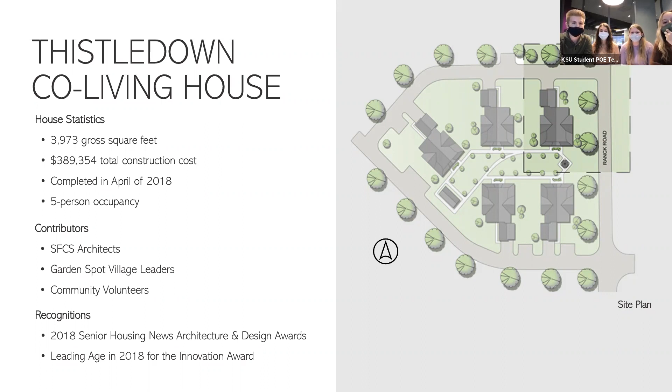At a larger scale, the co-living model seeks to solve social issues commonly associated with modern-day senior living. These issues include isolation for older adults, aging in place, and limited options for affordable housing. As a result, Garden Spot Village and SFCS architects sought to solve these issues by focusing on 3 things.

First, creating an environment that supports the sense of community for 5 unrelated individuals who reside under one roof. Second, applying universal design principles to accommodate all users. And third, providing a safe, high-quality, affordable housing option for low-income seniors.

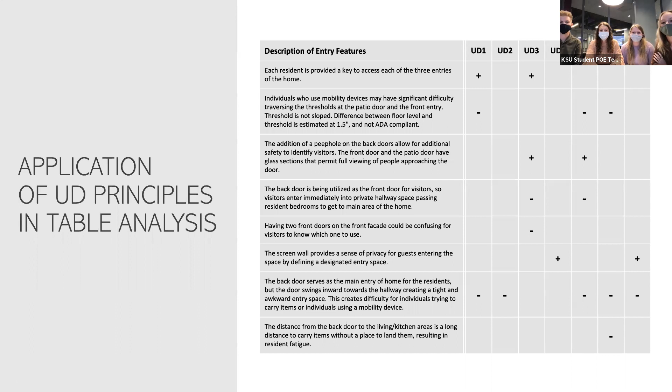Our analysis included 174 total observations throughout the house that correlated to the 7 universal design principles. About half of these observations were categorized as positive features, and about half were opportunities we sought to enhance the universal design for the occupants living within these co-living houses.

The results from these matrices were then crafted into recommended improvements for future co-living models, which we will get to later. So now it gets to the more fun part: the actual tour of the house.

We would first like you to see the overall floor plan and discuss its characteristics. The floor plan is defined by the centrally located primary social and community areas of the home that are shared by all residents. This includes areas such as the kitchen, located in the left portion of the yellow area, the living room in the upper middle portion, and the dining room in the bottom area that juts out a bit.

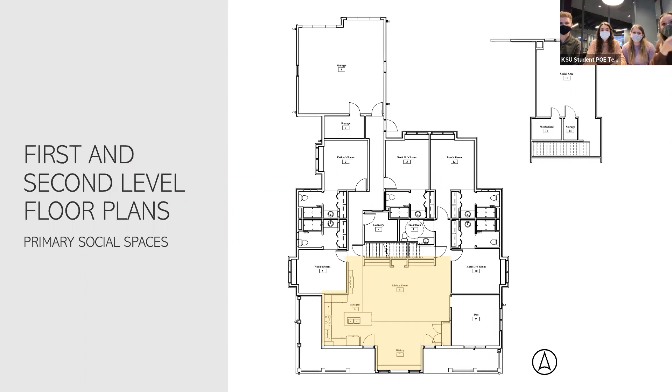There are also many secondary social and community spaces scattered throughout the house. This includes 2 front porches at the bottom of the plan in green, a private den off the living room towards the right at the bottom, a laundry room and guest bath at the center, the attached garage to the upper left, and a flex space that makes up most of the entirety of the second level.

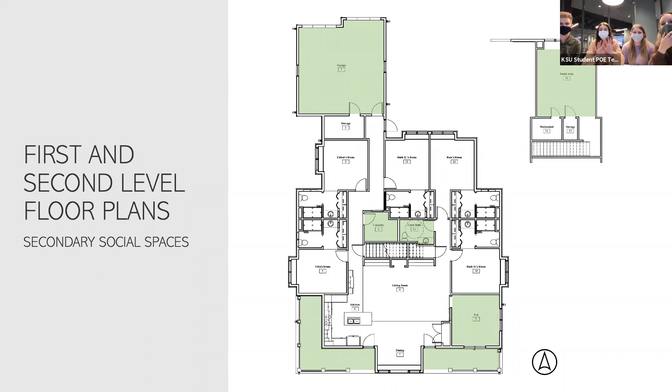The private resident suites are all along the two main hallways on the first floor, which also separates the rooms into two wings of the home. All bedrooms and bathrooms are equal in size and features, but slightly differ from each other in layout to aid in creating a suitable composition of the house.

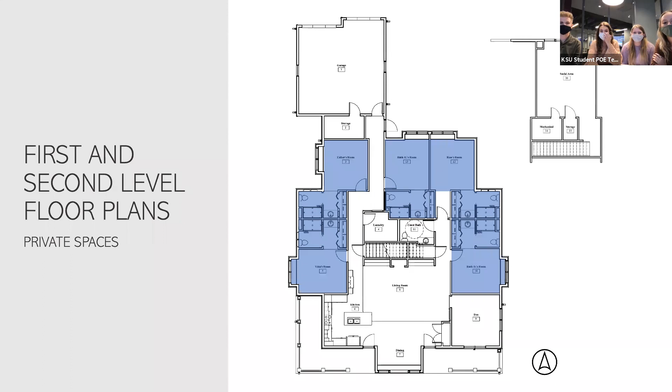Here you can see those two main hallways and the primary options for entering the home at the circles. Now we would like to walk you through the house with a little bit more visual aids, as in photos, to get you really into a feel for the space.

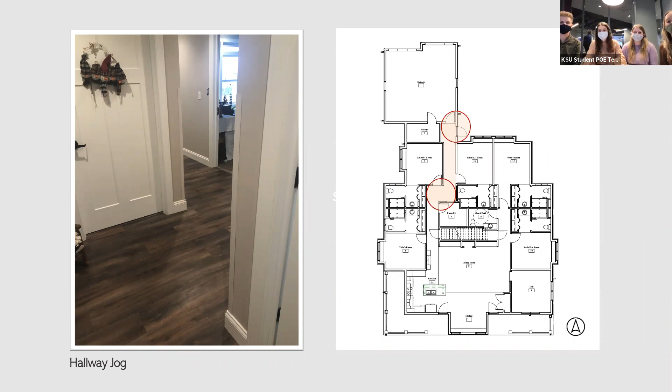So moving further into the space from the back by the resident entries, you are greeted with the personal doors of the resident bedrooms. And as you make your way towards the dog leg in the hallway, it becomes visible from the main social area by the kitchen and living room.

Around the corner from that is the laundry room, conveniently located. The space includes a mop sink, shelf storage, the washer and dryer, and a folding counter.

Past the laundry room entrance, the photo to the left gives you a view into the kitchen as you stand just past the hallway jog.

You can also see the location of the stairs off this main circulation path, not too far from the primary social spaces, as in the living room and kitchen areas.

So upon reaching the top of the staircase, you are met with a secondary seating area and tables used by the residents mostly for crafting activities. They use this space as a more private area to converse with their visitors or as a quiet place to carry out their own favorite hobbies.

There was also a closet used mostly by the residents for bulk and seasonal storage, as well as a mechanical closet. When we arrived here, we were able to see, and you can kind of see in this picture too, that one of the women had been working on a quilt.

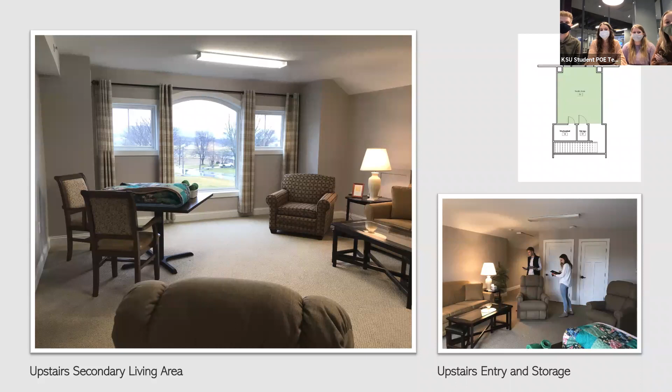So that was exciting to see how they actually used that space upstairs. Moving forward, back onto the first floor, the hallway shown previously opens up to the main social and gathering areas of the home. Along this path to the kitchen, there is what we identified as the media center that houses a lot of smaller miscellaneous storage items, as well as the residents' mail once they bring it in from the outside mailboxes.

Adjacent to this space is the U-shaped kitchen that circles a central island. There are many storage opportunities within the kitchen through upper and lower cabinets, tall full-size cabinets, and shallower cabinets even located within the island. The residents at the time used labels on shelves or drawers to denote their individual storage, as opposed to a more general non-labeled shared storage option.

And then located off the kitchen is a door that leads out to one of the two front porches at the Thistledown house. The two porches are separated by the extruded facade of the dining room, which helps to create the two specifically defined areas.

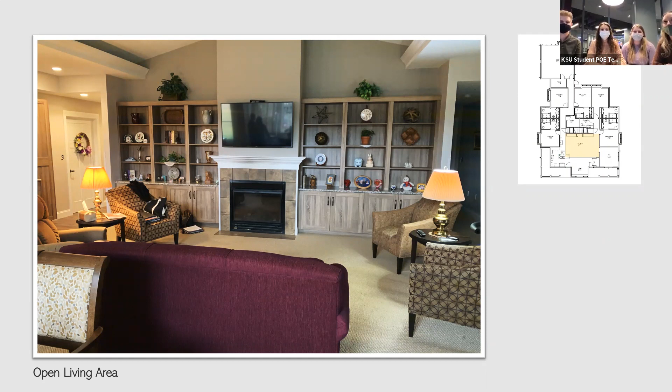This is the open living area, essentially the central hub of the house. There is a variety of seating options including 7 seats total to accommodate residents and guests. Along the back wall is built-in storage and a display case that lets residents create their own personal feel within the living room. It also features a vaulted ceiling that helps define the space from surrounding areas, as well as a fireplace with a TV hanging above it.

Off the living room is the den, a smaller, more private seating area that can be closed off from the public using sliding barn doors. This space has a lot of natural lighting and is used predominantly for lounging, making puzzles, and even looking out onto the street.

As previously mentioned, all 5 resident bedrooms and bathrooms are accessible by the 2 main hallways that branch off of the living room or main social areas.

Vida actually quilted her own bed covering, which features the state bird of all 50 states. That was sweet because we are all from different states, so we all got to sit there and she helped us pick out where our state bird was.

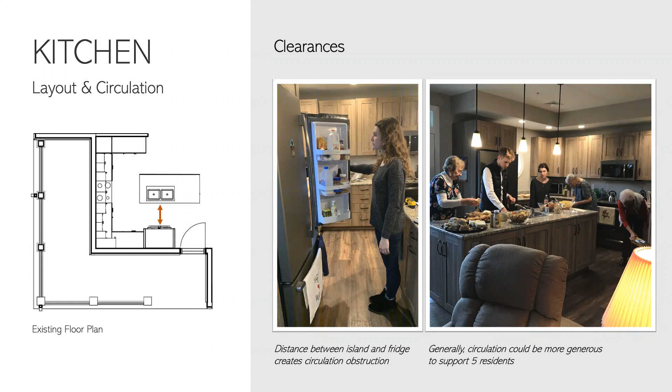In the image to the right, the team is shown with a few of the residents to show just how quickly the kitchen area can fill up and how these work zones may overlap and produce issues and/or frustrations.

To further expand on the overlapping of zones, let's take a look at the oven, range, and microwave zone, as well as the freezer and trash pull-out zone. These overlaps can cause serious injuries, such as dropping hot items over a potentially hot stove, pinching your fingers, and colliding with others in these circulation areas.

As for the freezer and trash overlap, these two pieces that pull out diminish any ability to walk through the kitchen when both areas are being used. You can also see here how the fridge's location interferes with the usability of the features located within the island. With a simple layout change, these overlaps can be avoided.

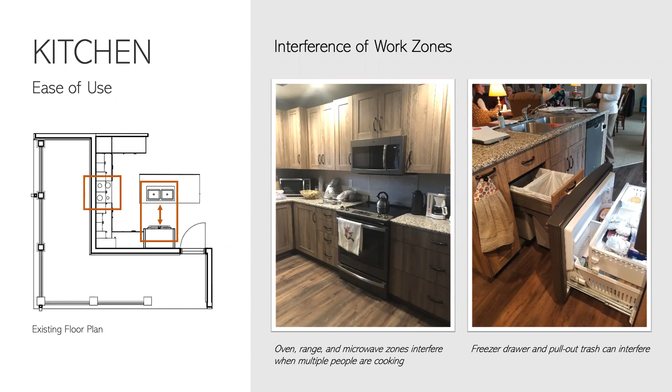Continuing the topic of ease of use, a significant portion of the upper cabinets are beyond standard anthropometric reach for the residents. While this limitation exists, the residents are currently discouraged from using step stools due to home policies. This leads to underutilization and reliance on staff for help when needing to access items placed there.

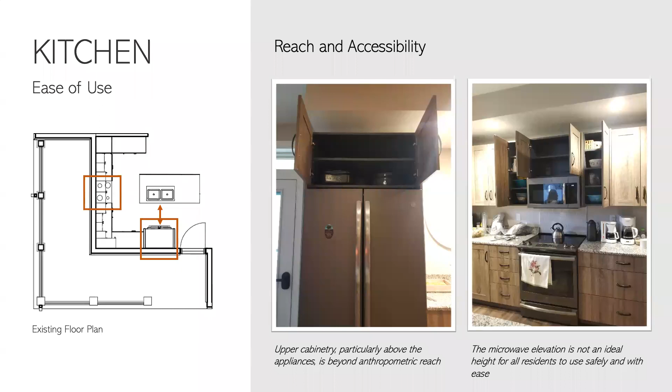Contradicting the idea of successful aging in place and residents' autonomy, the photo on the left shows cabinets installed above the refrigerator, but hardly any items are stored there. The photo on the right shows additional cabinets located above the recommended women's anthropometric reach, which is 69 inches maximum. These cabinets are also above surfaces that may be hot, which could lead to serious injury for residents.

Instead of the underutilized shallow storage space, the women would prefer to have an opportunity to sit at the island. These seats could be used for eating, visiting, or support when cooking. This would encourage collaboration, provide an additional eating zone, and provide a place of rest if one feels the need to sit while preparing food or carrying out a task within the kitchen.

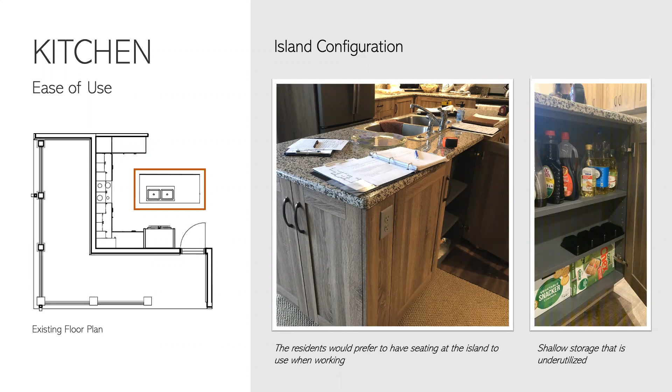Now that we've talked a little bit about the overall layout of the kitchen and a couple of our initial observations, something else we observed was an opportunity to improve the lighting situation in the kitchen.

Lighting in the kitchen is really important to avoid errors and provide visual clarity, especially for those aging in place. In this kitchen, there are no under cabinet lights present, producing dark shadows. When we took measurements, the foot candles underneath the cabinetry were very low. Under cabinet lighting would help bring that number up to a safer threshold.

In addition, ambient lighting could generally be improved by providing a variety of lighting so that the ladies can make adjustments based on their needs and the time of day. As you can see from the image on the right, the main lighting present is above the island and a couple of recessed lights within the soffits.

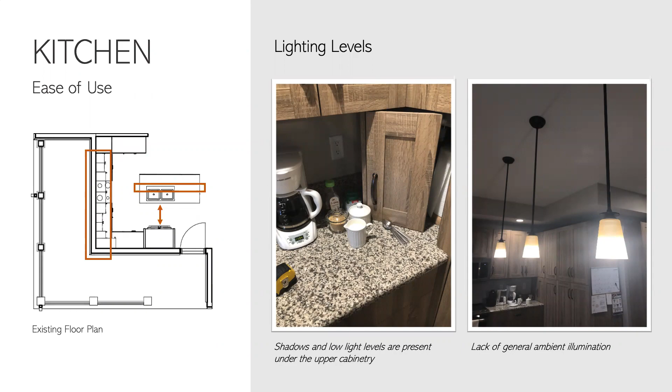Upstairs, there is a large window for natural light as well. What's more of concern here is the variety of color temperatures that are present. The ambient lighting is cooler, whereas the task lighting is warmer. It would be better for these temperatures to be consistent so that the eye does not have to readjust between tasks, and this is a simple change.

In the living room, general lighting is not present at all. The large window does allow natural light into the living area, but it does not provide foot candles sufficient enough to carry out certain tasks. When standing in the middle of the room in the middle of the afternoon, our foot candle reading came out to be 3. For those unfamiliar with those readings, that is very low. It'd be preferred to have it read at 30 foot candles.

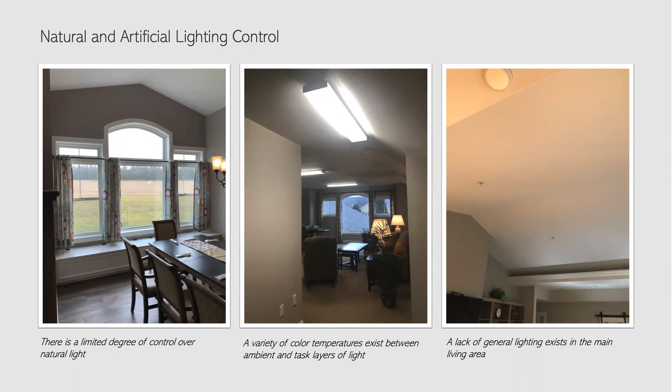One of the concerns brought to our attention during the focus group was the need for the hallways to be wider. In the case of an emergency where a gurney has to enter the bedroom, the hallways are too narrow to turn and enter where the resident in need is located. This was very concerning to the ladies, as they witnessed a friend struggle to get immediate help, and more than likely worried about if they were in that situation, whether they would get the help they needed as well.

This is an example of something we did not anticipate. A lot of the questions we asked the ladies during our focus group were based upon our initial observations, simply from studying the floor plans we received before our visit. This, among a couple of other points, was brought to our attention as the discussion carried on with the ladies in that focus group.

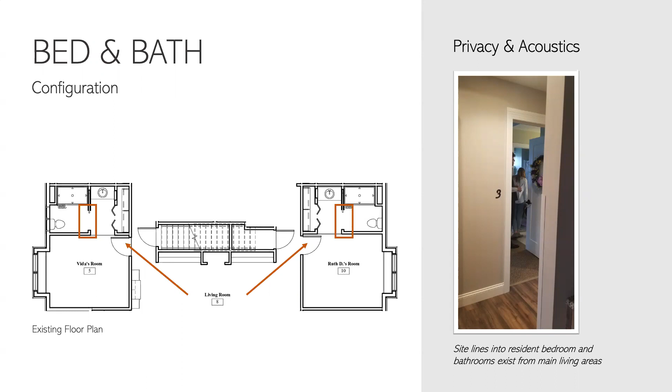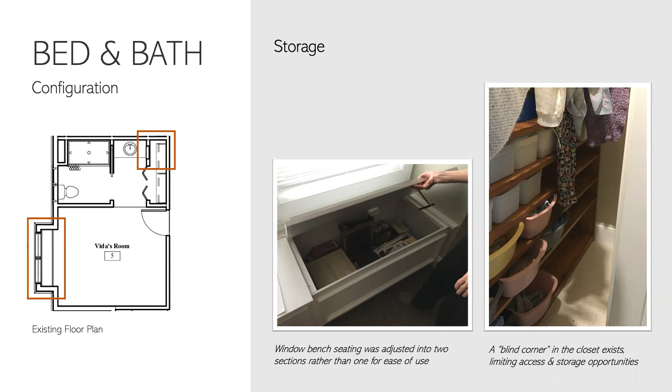Each bedroom and bathroom configuration is also provided a private closet that is accessible from the sink area that Hannah showed in the tour. One issue this location creates is what's called a blind corner, or a corner that is not accessible. As you can see from the image on the right, this limited access makes for lost storage opportunities. A quick fix would be the addition of horizontal shelving in that corner. There are, however, some other iterations that we have explored and will show you shortly.

One issue of immediate concern is the thresholds at those front entries. While the back door is most prominently used, the front doors do allow the residents access to the porches where they enjoy drinking coffee, watching cars drive by, or just getting some fresh air. To avoid a tripping hazard, this is one issue that should be remedied as soon as possible. A similar concern applies at the back door. Here, the threshold is sloped, but it is at a sharp incline. For those using a walker or potentially in a wheelchair, this may be challenging to properly navigate.

And that concludes some of our initial observations through our focus group that we outlined in our design charrette. And with that, I'll be handing it over to Sydney to go through our table analysis.

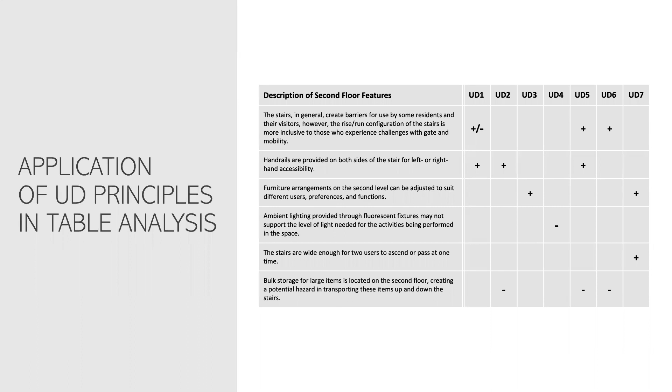So this matrix overall was the most effective way to create solutions and understand their benefits to positively impact the current and future residents of Garden Spot.

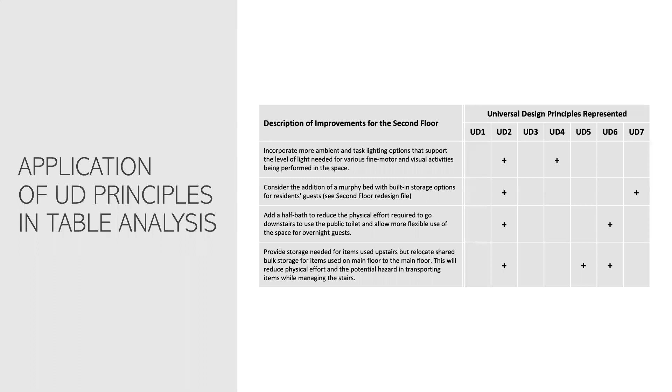However, all recommendations focus on improving resident health, safety, and well-being to various degrees. Additionally, cost and ease of implementation was also considered. We recommended the incorporation of as many of these high priority improvements as possible in the next co-living house to achieve a more cohesive, universally designed solution.

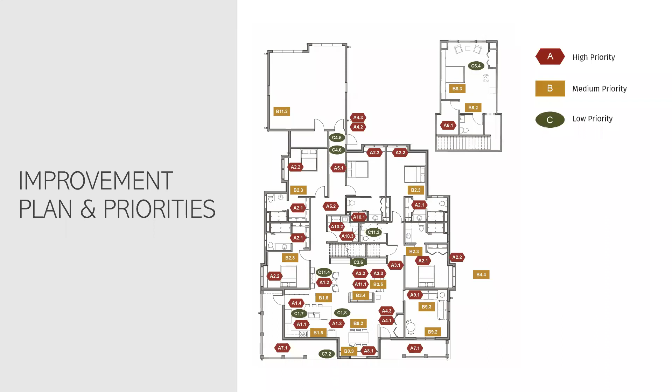A complete list of these recommendations is also presented in our white paper, available on the SAGE website. So to better explain this process, here we have provided an example of how the recommendations are divided by priority, this being the second floor space. Again, A in red indicates high priority improvement, B in yellow indicates medium priority, and C in green indicates low priority.

So the high priority for the second floor was to move the bulk storage area to the main floor. This was a high priority due to the safety concern for the residents, as they would have to move heavy items up and down the stairs.

The first medium improvement was to add a half bathroom to the second floor to enhance the ease of use of this space, so that residents and/or guests can avoid going up and down stairs to use the restroom. The second medium priority was to incorporate a Murphy bed with storage that is able to fold down in the space and fold up when it is not being used.

This suggestion was discussed during the design charrette and was considered within the final improvements for guests when they visit Thistledown. The medium priorities enhance the space, however they are not crucial to resident health or safety.

The low priority improvement for the space was to increase lighting options and quality for the residents. As stated previously, there was a variety of color temperatures being used in the second floor area, so this improvement predominantly affects the aesthetics of the space and has little concern with resident health and safety.

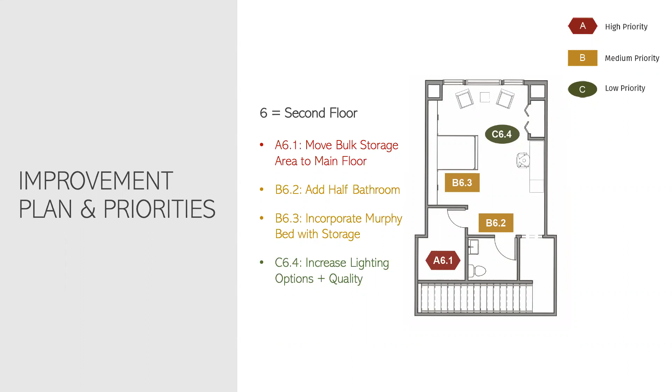When considering ways the kitchen could be adapted to enhance resident usability and satisfaction, we reflected on the topics discussed during the charrette and our priority improvement list for the kitchen. To respond to the highest priority category, we decided that changing the layout slightly could improve efficiency for all users.

and eliminate additional appliance usage in the garage. By eliminating appliance overlap, this allowed for a wall-mounted oven and microwave at the end of the cabinetry along the south wall, getting rid of the need for an additional microwave on the counter. It also prevents the range, microwave, and oven from being stacked in one area, which was creating conflict when multiple residents use the kitchen simultaneously.

Additionally, the sink, dishwasher, and range are all placed with no appliance usage overlap. The residents also expressed that having seating at the island would be preferred over additional shallow storage, resulting in the proposed layout that includes seating for 3. Finally, the proposed layout provides an open space at the far right side of the island next to the 3 chairs that allows for a movable cart to transport groceries and other items from the back door to the kitchen.

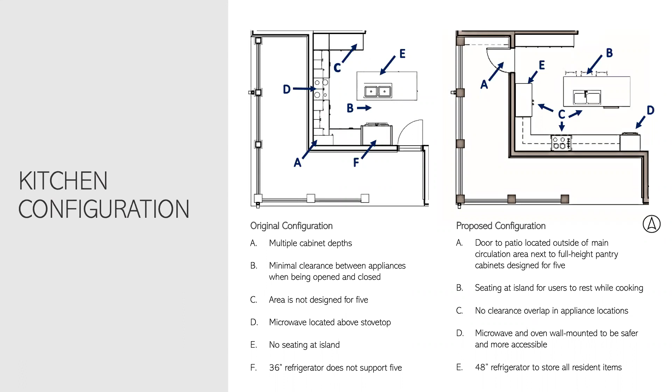While we spoke to the residents of the home and gathered information from the charrette, we were able to take all of the feedback regarding the kitchen and begin to visualize what this space could look like. We were able to incorporate our improvements for the home and understand how the space could evolve and provide a beautiful and functional solution for the residents' kitchen issues.

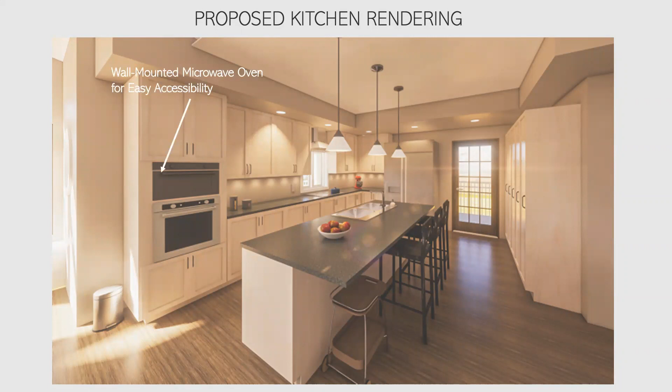First, we responded to the appliance recommendation for a new microwave location. We placed the new microwave at typical standing height for easy reach and accessibility. Next, we implemented under cabinet lighting to diminish dark shadows that were present on the counter while cooking, to reduce the risk of injury due to low lighting levels.

Next, a large refrigerator was implemented to combat the food storage issue and eliminate any need for additional refrigerator or freezer in the garage, as well as allow for all users to have their own areas for food within the refrigerator. Then, due to the residents having to often lay towels or washcloths on the counter before placing coffee mugs, plates, and other things on the counter, we wanted to provide a solution for these loud countertops.

We have provided the suggestion of Paperstone countertops that will better absorb sounds and eliminate loud noises that previously disturbed residents, especially those sleeping adjacent to the main living areas. Paperstone is created from 100% post-consumer recycled paper and petroleum-free resin that would easily absorb noise from everyday kitchen activities.

Next, at the island, in addition to providing seating for eating and food prep, we provided a small area below the island for a mobile rolling cart. The residents mentioned fatigue that is typically caused from transporting heavy groceries and other items from the garage to the kitchen. Therefore, the cart is an easy accessible location when the residents need assistance transporting their items.

Then we designed full height cabinetry for a space specifically designed for 5 users so that every user has their own area. By allotting for 5 residents specifically, this makes every user feel personally designed for and provides completely functional storage space in the kitchen.

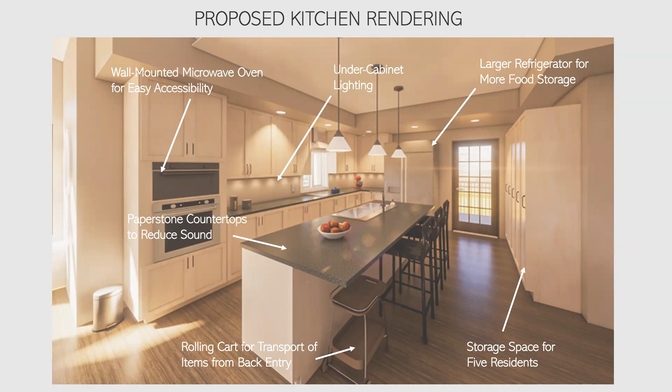Lastly, you'll notice we were able to accomplish the successful layout due to the second entry door that was moved from the front facade to the side of the home, to eliminate confusion and give the residents a more private porch area.

Within the bedroom and bathrooms, we designed each bedroom configuration differently to show how we explored different design options that can easily be applied to the other units of the home as well.

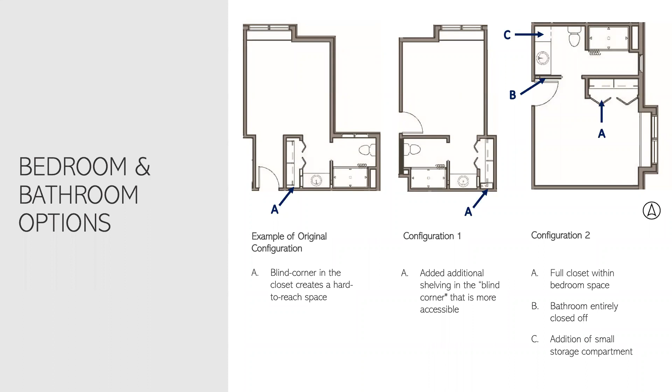In configuration 2, we created a solution that repositioned the closet from within the bathroom area to the bedroom. This would allow for a closed-off bathroom, eliminating sight lines from living areas to the bathroom, as well as a larger closet and a linen area next to the vanity. However, this solution slightly diminishes the bedroom area, but is still very functional.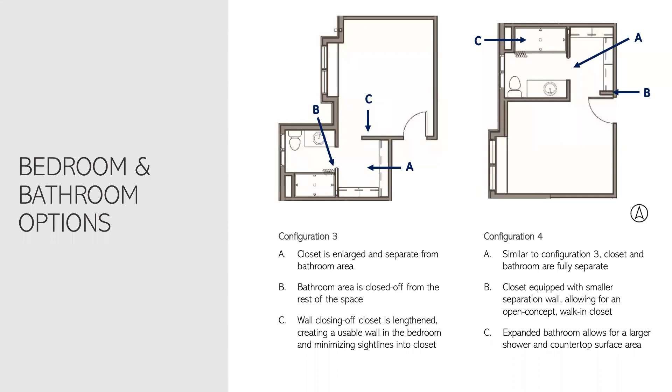As stated in the first part of the presentation, one of the primary goals for the Thistledown co-living house was to create a cost-effective living option for aging users. As we took observations from the design charrette and post-visit analysis, making budget-conscious changes that would maximize universal design was one of our primary goals as the POE team.

In the original floor plan, the summation of the first and second floor gross square footage was 4,337 square feet. At $90 per square foot at the time of construction, the total cost of Thistledown was $390,330. With all of our recommended improvements and design modifications, the first and second floor square footage came out to 4,447 square feet, our design only adding 110 square feet more.

At $90 per square foot at the time of construction, our design would total up to $400,230. So for only a small difference, the space would be more universally designed and particularly focused further on the health, well-being, and comfort of the current users and future residents of Garden Spot. And I will turn it back over to Lauren for the forthcomings.

Thank you, Sydney. How wonderful is it to have all these bright and thoughtful designers present today? These students are in the wings and they will soon take center stage of their career. They've completed an indicative level SAGE POE, which is no small feat, and have demonstrated evidence-based problem solving in their designs.

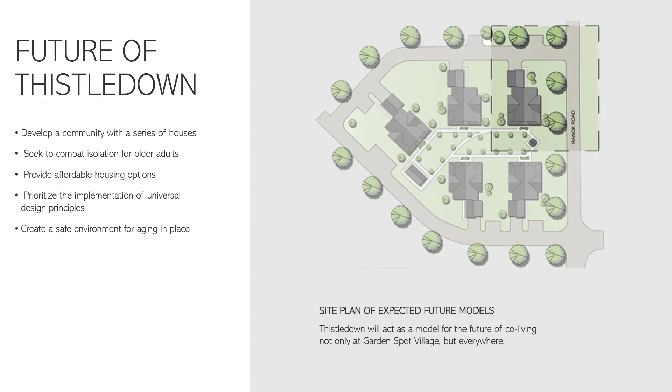It led us to think further to the possibilities of co-living and why it works well. We see great benefits in this model for seniors. It has the opportunity to create community, minimize isolation, and increase access to aging in place opportunities for older adults.

Co-living provides a creation of community. This model is unique because it consists of unrelated individuals that have not previously lived together and puts them in a residential setting. This gives them an opportunity to build social relationships and gain a support system. Community generally gives people a feeling of fellowship with others because of the commonality of living in the same house. From a senior living lens, the benefit could mean that an individual has a community of people that can support each other both socially and sometimes physically, amongst other things based on the group's commonalities.